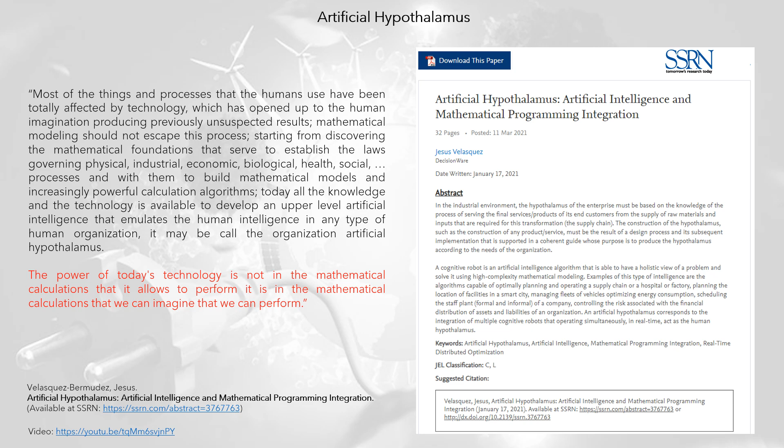Artificial hypothalamus. The power of today's technology is not in the mathematical calculations that it allows to perform, it is in the mathematical calculations that we can imagine that we can perform.

Oil supply chain optimization. Oil enterprise-wide optimization integrates mathematical models for each of the links in the oil supply chain, in such a way as to manage the planning of the supply chain with a holistic vision.

The design of HAI-OIL EWO was the result of work done for a multi-business oil company. The union of models, and their coordination, forms the hypothalamus of an oil enterprise.

The current computational power allows detailed modeling of the supply chain, considering individually all the systems that compose it. This allows visualization of all existing bottlenecks that affect the maximization of economic gains.

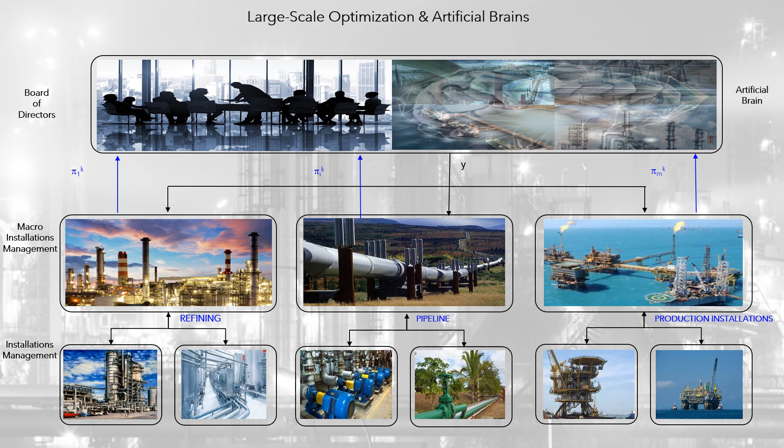When all the models that make up a company are solved using the concepts of real-time distributed optimization, an artificial hypothalamus is obtained. Large-scale optimization and artificial brains.

One of the fundamental ideas of the artificial brain is the atomization of the system, a bottom-up approach, to integrate multiple mathematical models, using the framework of large-scale optimization methodologies, like multi-level Benders decomposition and Lagrangian relaxation.

HAI-OIL meets all the software solutions developed by HI, in different areas of application of mathematical optimization models, oriented to planning and scheduling operations, in different businesses of the petroleum product supply chain.

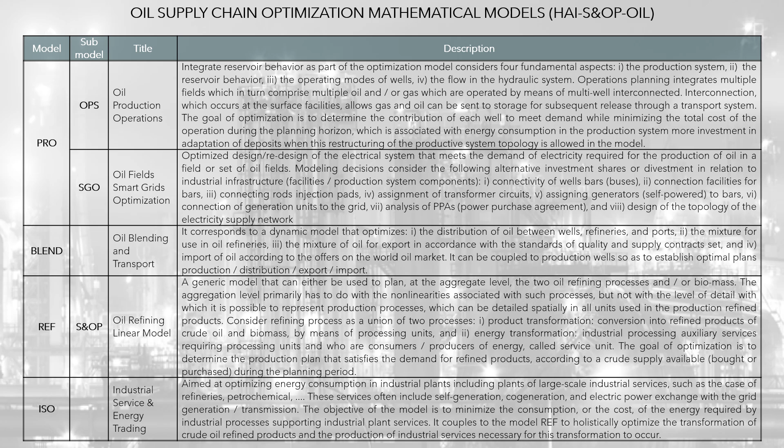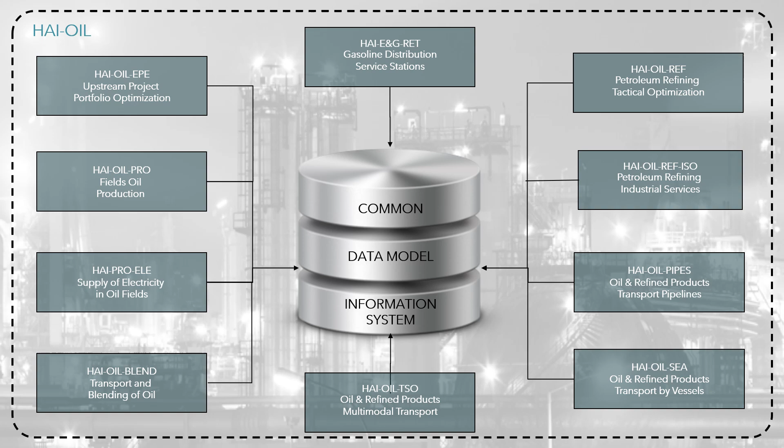All models may be part of the hypothalamus of an oil organization. All models that integrate an artificial hypothalamus must share a general data model so that they are easily integrated. In 2010, HI executed the project: The Hypothalamus of an Oil Organization.

Challenge: design and implementation of a DSS decision support system for the optimization of energy resources that links all steps of the supply chain of petroleum products, with emphasis on the consumption and marketing of the energy used by the network.

Solution: design and prototype implementation of a DSS with the following models: production of crude oil, transportation of crude oil, oil and biomass refining, production and industrial services, and transport of refined products.

Result: the model is the base for the formal implementation of the value chain model for a Latam petroleum company. The models were delivered in prototype version, in the sense that the oil company did not have the database ready in the expected time. This is one of the most important projects developed by HI.

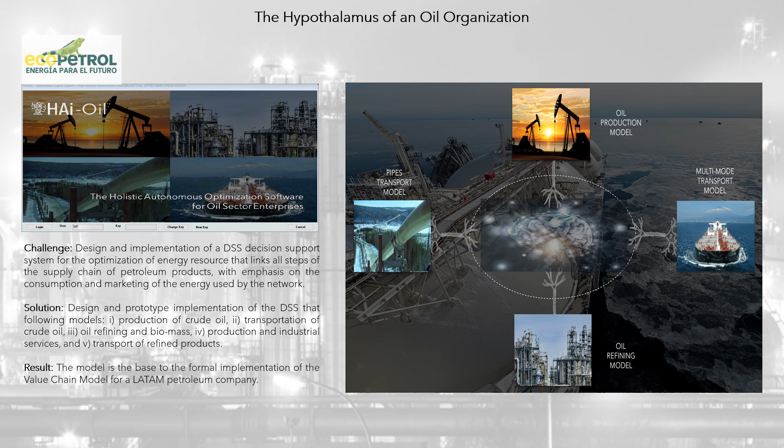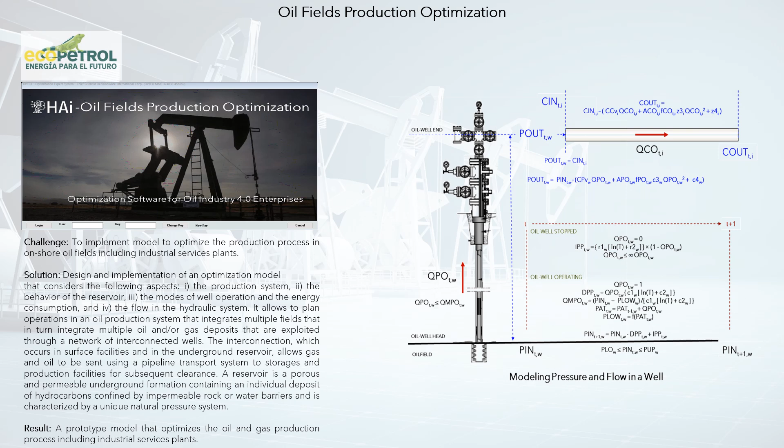Oil production optimization. Oil fields production optimization model. Challenge: to implement a model to optimize the production process in onshore oil fields, including industrial services plants.

Solution: design and implementation of an optimization model that considers the following aspects: the production system, the behavior of the reservoir, the modes of well operation, the energy consumption, and the flow in the hydraulic system.

It allows planning of operations in an oil production system that integrates multiple fields, which in turn integrate multiple oil and/or gas deposits, that are exploited through a network of interconnected wells.

The interconnection, which occurs in surface facilities and in the underground reservoir, allows gas and oil to be sent using a pipeline transport system, to storages and production facilities for subsequent clearance.

A reservoir is a porous and permeable underground formation, containing an individual deposit of hydrocarbons confined by impermeable rock or by water barriers, and is characterized by a unique natural pressure system.

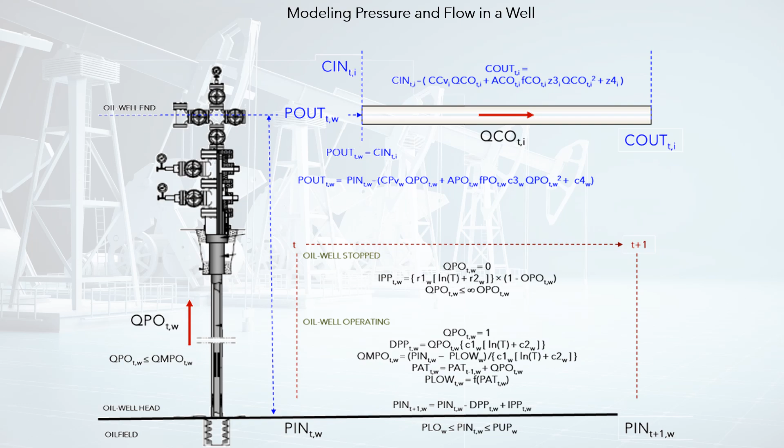The conceptualization of the field can be done based on the following principles. Well: it corresponds to the basic unit of production.

Reservoir: it corresponds to a set of wells that operate an oil deposit interconnected in the subsoil. Field: it corresponds to a set of multiple oil deposits which contribute their production to a collection and processing infrastructure.

The collection infrastructure is composed of: separator, a production unit in which oil, gas and water are separated; collector, composed of a network of pipes that connect the fields with the separator; and tanks, storages of oil, gas and water already processed. The topologies of the network can be very varied, since an O&G production facility can have multiple components of each type.

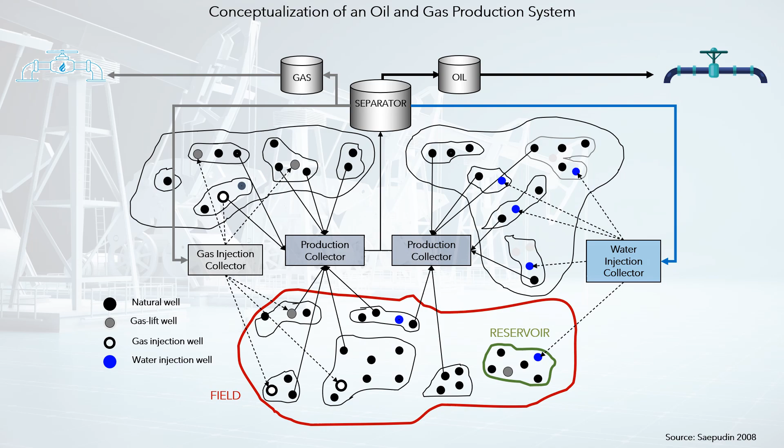Project: Exploration and Production Investment Petroleum Portfolio Optimization. Challenge: to optimize the portfolio of investment projects in oil exploration and production (E&P) activities.

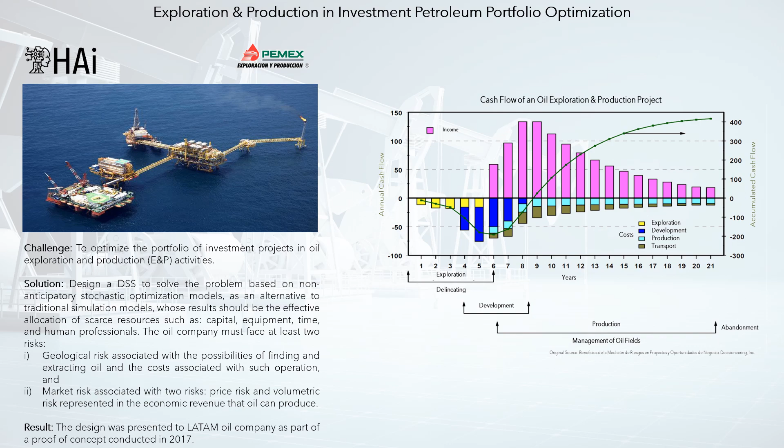Solution: design a DSS to solve the problem based on non-anticipatory stochastic optimization models, as an alternative to traditional simulation models, whose results should ensure the effective allocation of scarce resources such as capital, equipment, time, and human professionals.

The oil company must face at least two risks: geological risk, associated with the possibilities of finding and extracting oil and the costs associated with such operations; and market risk, associated with price risk and volumetric risk, represented in the economic revenue that oil can produce.

Result: the design was presented to a Latam Oil Company as part of a proof of concept conducted in 2017.

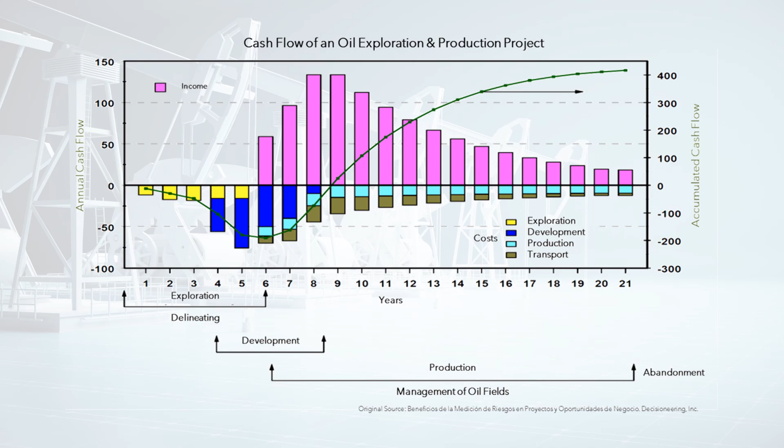Project: Oil Fields and Smart Grids Optimization. Challenge: to develop a model to redesign the energy supply system of oil onshore fields.

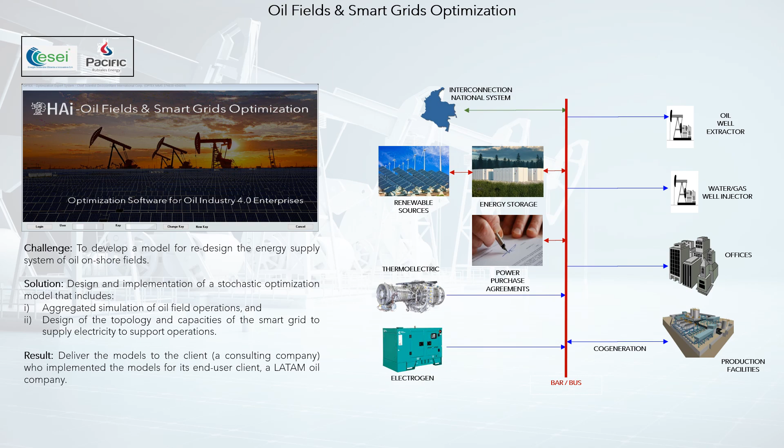Solution: design and implementation of a stochastic optimization model that includes aggregated simulation of oil field operations, and design of the topology and capacities of the smart grid to supply electricity to support operations. Result: deliver the models to the client, a consulting company, who implemented the models for its end-user client, a Latam oil company.

Oil refining optimization. Sales and operations planning. Linear model. Challenge: to implement a model to optimize sales and operations planning for refineries and biorefineries.

Solution: design and implementation of an S&OP optimization model for aggregated planning of crude oil and biomass refining. Aggregation is associated with process nonlinearities, but not with the level of detail to represent process connectivity. The objective of optimization is to determine the production plan that meets the demand for refined products, according to a supply of available crudes purchased during the planning period.

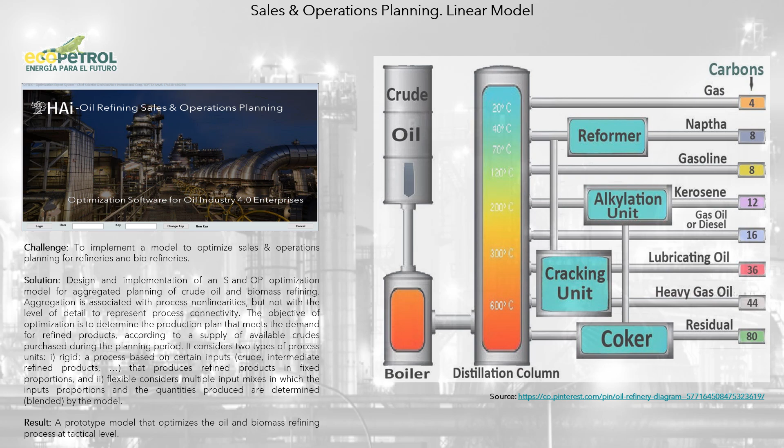It considers two types of process units: rigid, a process based on certain inputs - crude, intermediate, refined products - that produces refined products in fixed proportions; and flexible, which considers multiple input mixes in which the input proportions and the quantities produced are determined, blended, by the model.

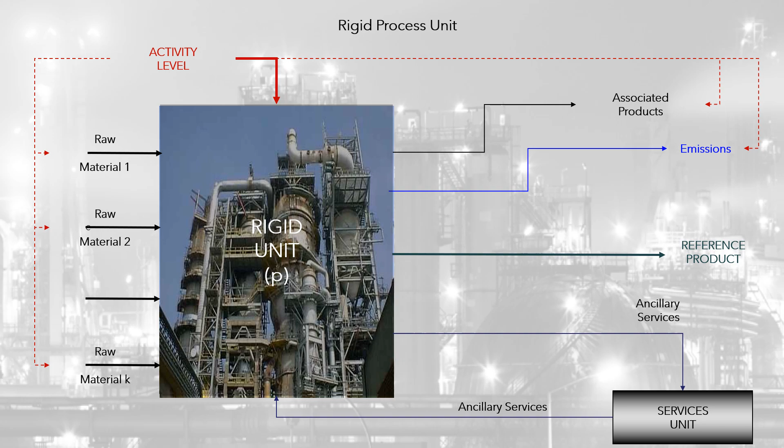Rigid unit considers a unit as a process defined based on certain input - raw material, refined final or intermediate products - that produces refined products in fixed proportions. Flexible unit considers multiple possibilities for production processes in which the proportions of the blending of the products consumed, and the quantities produced, are determined by the model.

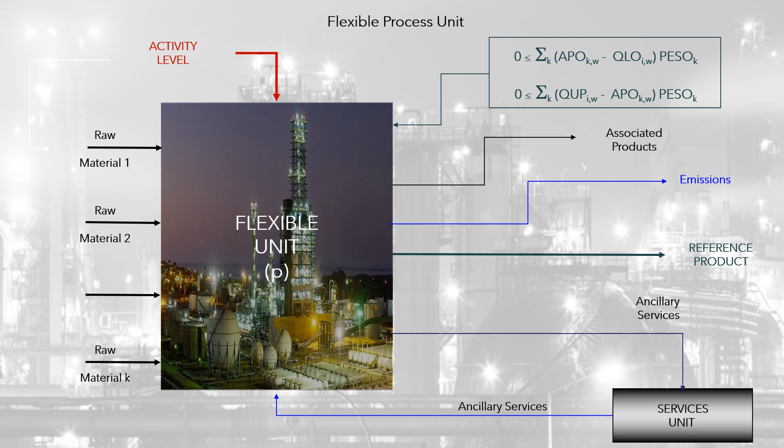Refined petroleum production and energy services planning model. Challenge: to develop an integrated production and industrial services optimization, considering that the optimal management of power of industrial systems implies a holistic position oriented to integrate the production planning of goods with industrial energy services that are consumed in the production plant, and finally integrate it with possibilities of self-production and negotiation of this energy in the energy markets.

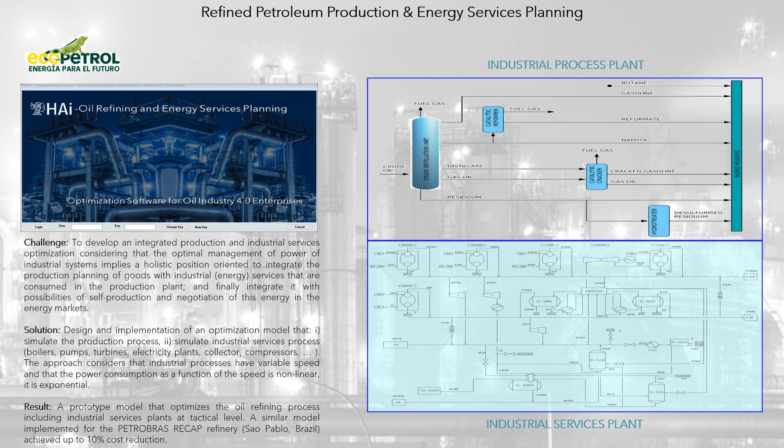Solution: design and implementation of an optimization model that simulates the production process, and simulates industrial services processes like boilers, pumps, turbines, electricity plants, collectors, compressors, etc. The approach considers that industrial processes have variable speed, and that the power consumption as a function of the speed is nonlinear, it is exponential.

Service plant: place where various industrial operations related to the auxiliary services demanded by process plants are developed. Auxiliary service: essential services for the operation of any production system. They allow guaranteeing the quality and continuity of the process.

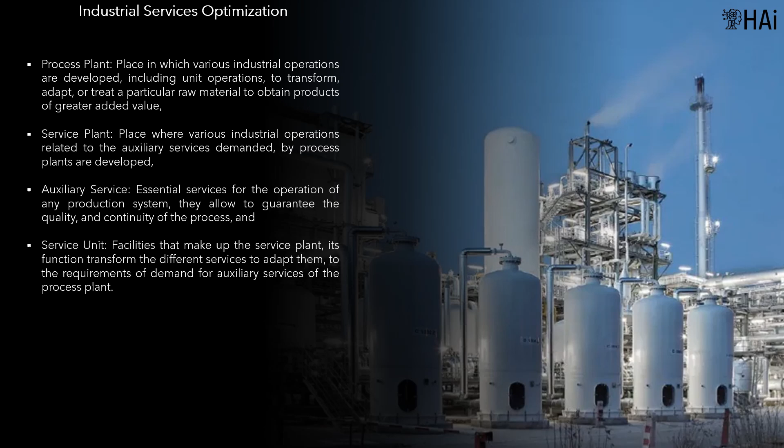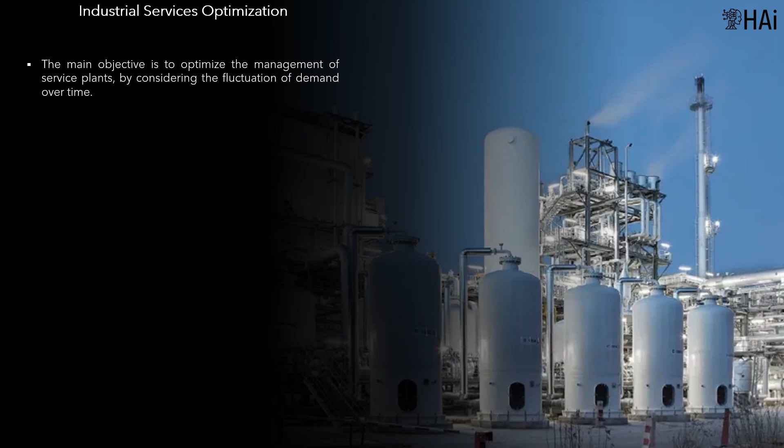Service unit: facilities that make up the service plant. Its function is to transform the different services to adapt them to the requirements of demand for auxiliary services of the process plant. The main objective is to optimize the management of service plants by considering the fluctuation of demand over time. The optimization of the two plants is carried out in an integrated model.

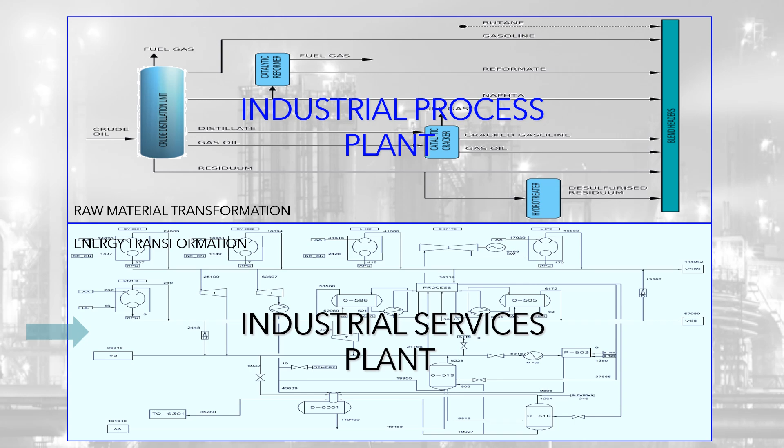Result: a prototype model that optimizes the oil refining process, including industrial services plants at tactical level. A similar model implemented for the Petrobras Recap refinery, São Paulo, Brazil, achieved up to 10% cost reduction. It is part of the oil and gas artificial hypothalamus.

Oil transport, trading and blending optimization corresponds to a dynamic model that optimizes oil distribution between wells, refineries and ports, the oil mix for use in refineries, the mixture of oil for export in accordance with quality standards and established supply contracts, import of oil according to offers in the spot global oil market, and import/export of oil according to offers in oil derivatives financial instruments.

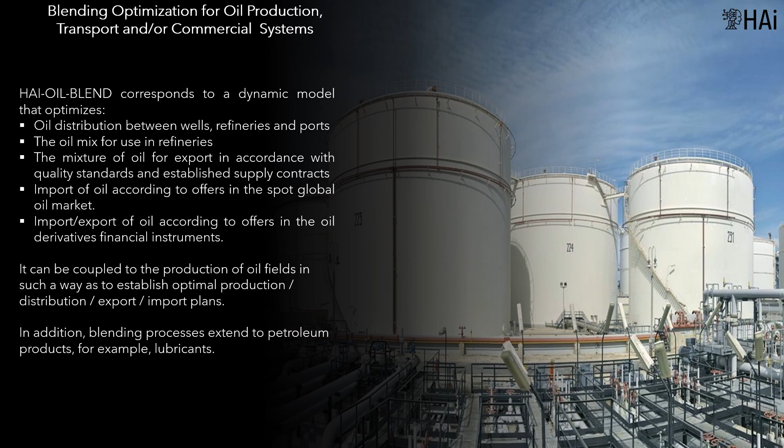It can be coupled to the production of oil fields, in such a way as to establish optimal plans for production, distribution, export and import. In addition, blending processes extend to petroleum products, for example, lubricants.

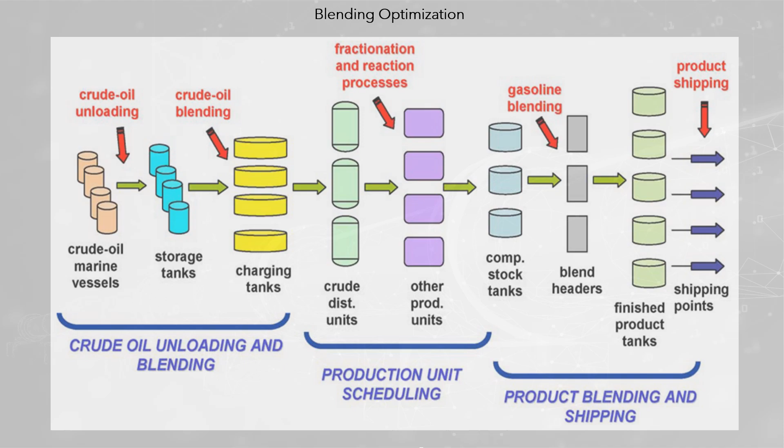In the petroleum chain, the blending process of materials takes place in several parts. In the refineries, at the entrance of the refining process, blended crude oil is required, and at the exit, it is necessary to mix the refined products. These blending systems can be located in a distributed manner, which can lead to significant cost savings, due to the flexibility of the crude oil chain.

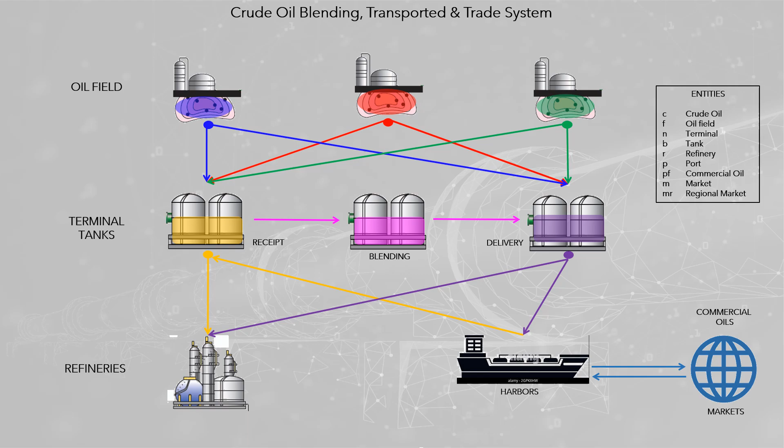The diagram presents the flow of materials in the petroleum system. The entities considered in the modeling are crude oil, oil field, oil terminal, tank, refinery, oil port, commercial oil, market, and regional market.

R&D+I project: oil blending and transport planning and scheduling model. Challenge: to implement an oil blending dynamic optimization model. Solution: design and implementation of an oil blending dynamic mathematical model. Result: implementation of a prototype model in a joint effort with Deloitte Mexico to perform a proof of concept for a potential client. Unfortunately, the customer didn't buy.

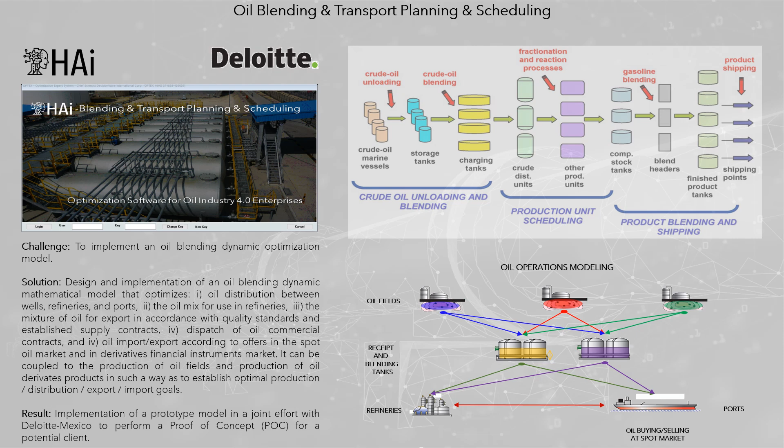Pipeline systems optimization. HAi includes solutions aimed at planning and scheduling operations in the supply chain of transportation services. It considers two types of transport: pipelines and multimodal vehicles, such as tankers, barges, boats, and trains. The models developed by HAi are tactical pipeline planning, scheduling pipeline batches, real-time pipeline dispatch, coordination of petroleum vessels and installations, and petroleum and refined products distribution.

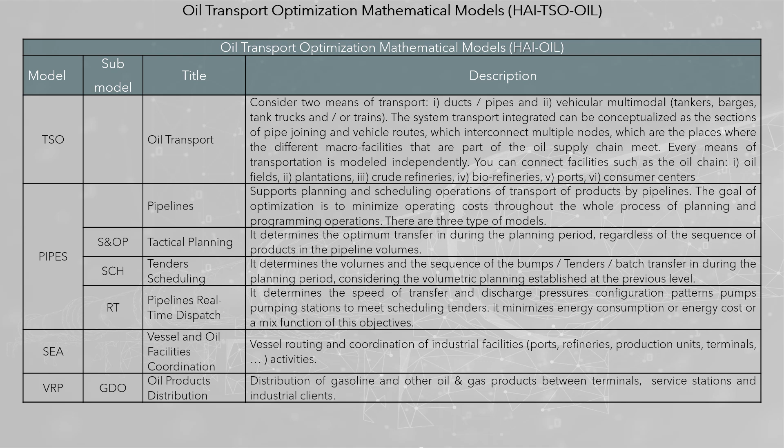Project: real-time optimization of the operations in oil pipeline systems. Challenge: to design and implement models for real-time optimization of the operations in oil pipeline systems. Solution: design and implementation of a set of optimization mathematical models that include the use of pumping stations and the simulation of operating conditions based on detailed models of the hydraulic behavior of the system components. The solution includes large-scale optimization methodologies.

Result: real-time operations model to dispatch the batches of products, heavy crude oil, in the pipelines. In test case runs, it was verified that the difference between minimizing energy consumption and minimizing the total cost of operation can be of the order of 20%.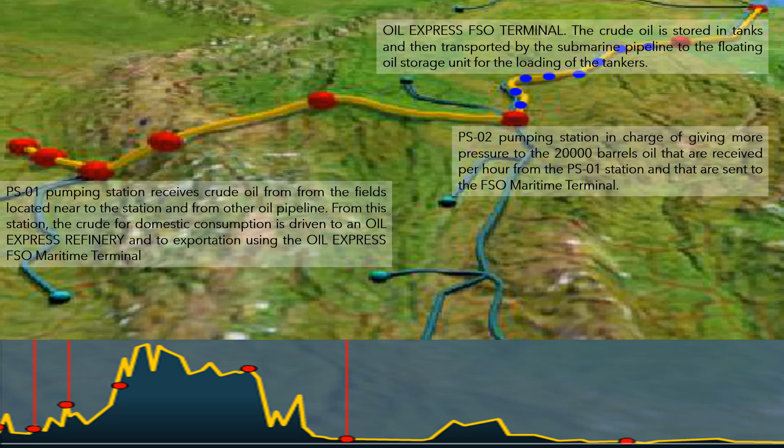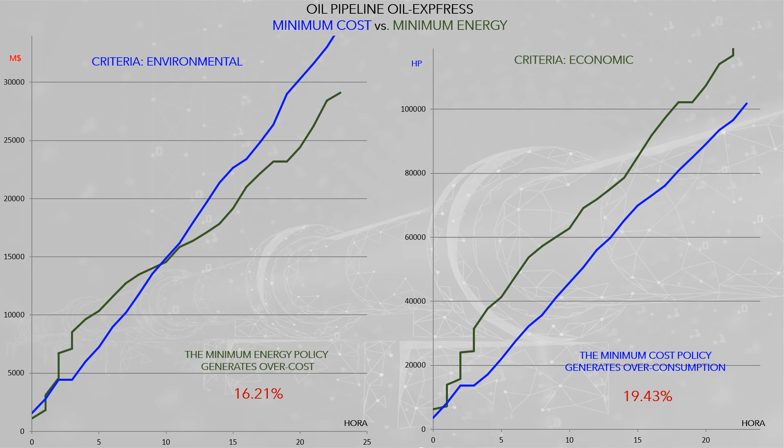Comparing the results of the objective function of the two operating policies, it can be observed that the minimum energy policy generates 16.21% overcost, and the minimum cost policy generates 19.43% overconsumption. As you can see, the differences are not negligible, and are a measure of the precision that mathematical models can provide when solving real-life problems. Estimating this difference based on good practices and/or mental models is practically impossible.

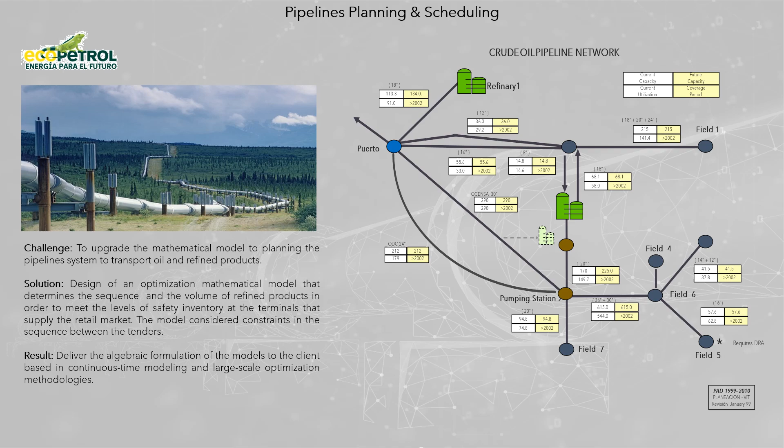Project: Pipelines Planning and Scheduling. In 2003, HAi received a request from a Latam oil company. Challenge: to upgrade the mathematical model for planning the pipeline system, to transport oil and refined products. Solution: design of an optimization mathematical model that determines the sequence and volume of refined products to meet the levels of safety inventory at the terminals that supply the retail market. The model considered constraints in the sequence between the tenders. Result: delivery of the algebraic formulation of the models to the client, based on continuous time modeling and large-scale optimization methodologies.

Vessel scheduling optimization supports the programming of collection and/or distribution operations of products via maritime ways, in tankers and barges. It considers restrictions for delivery and load time windows, distribution of capacities on ship, loading and unloading capacity at the docks, draft capacity, speed of movement of ships, tanker weight to draft ratio, and synchronization of filling or emptying of storage tanks.

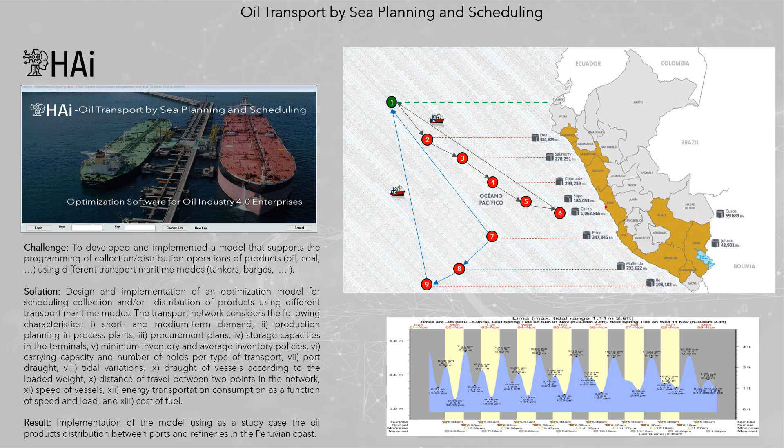Research and Development Project: Oil Transport by Sea, Planning and Scheduling. Challenge: to develop and implement a model that supports the programming of collection and distribution operations of products, oil, coal, using different maritime transport modes, like tankers, barges, etc.

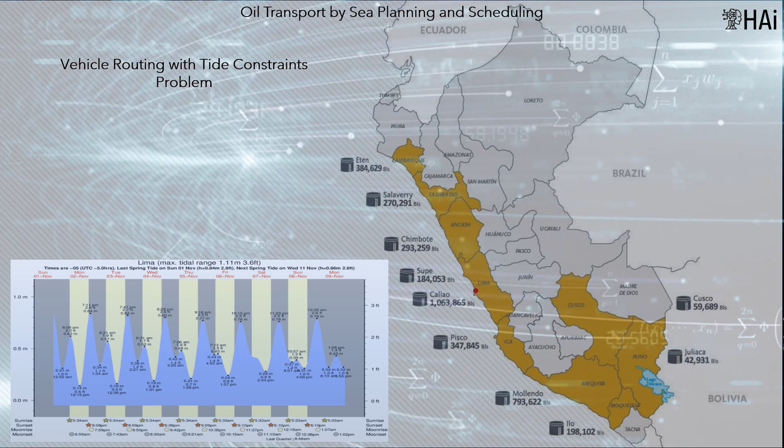Solution: design and implementation of an optimization model for scheduling collection and/or distribution of products using different transport maritime modes. The transport network considers the following characteristics: short and medium-term demand, production planning in process plants, procurement plans, storage capacities in the terminals, minimum and average inventory policies, carrying capacity and number of holds per type of transport, port draft, tidal variations, draft of vessels according to loaded weight, distance of travel between two points in the network, speed of vessels, energy transportation consumption as a function of speed and load, and cost of fuel.

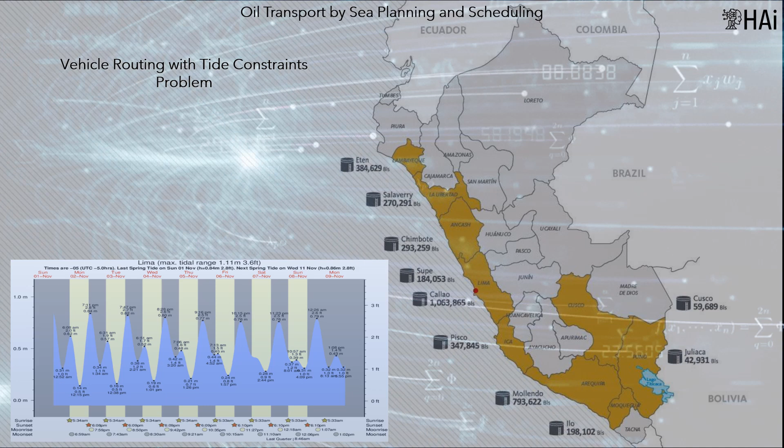A real case of distribution of petroleum products by sea, with tidal restrictions, is the planning of the distribution of products from the Talara refinery along the oil terminals in the Peruvian coast. When it is necessary to make decisions about the displacement of the vessel, it is of fundamental importance to correctly model the consumption of energy, which has a nonlinear behavior with respect to the engine speed of the vessel. This constraint can be included in the mathematical model, as well as the modeling of tidal movements when entering or leaving ports. Result: implementation of the model using as a study case the oil products distribution between ports and refineries in the Peruvian coast.

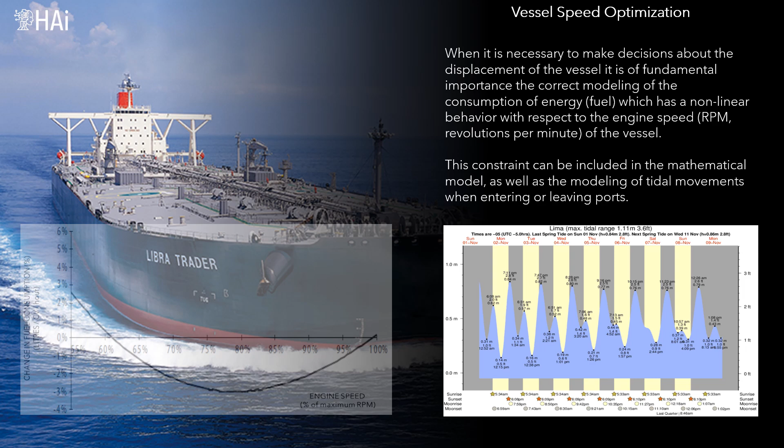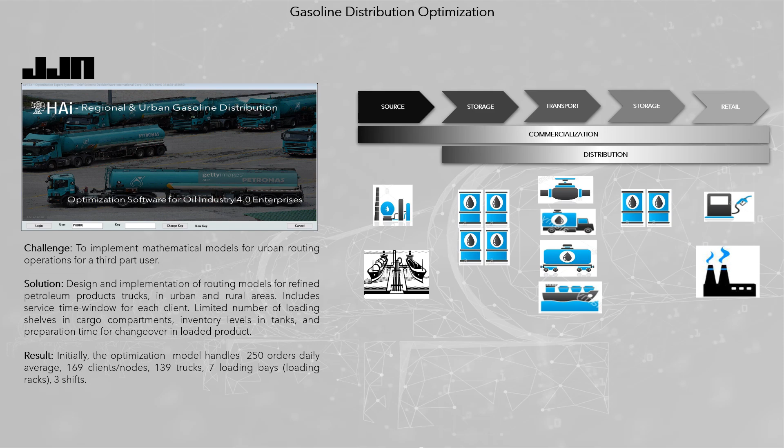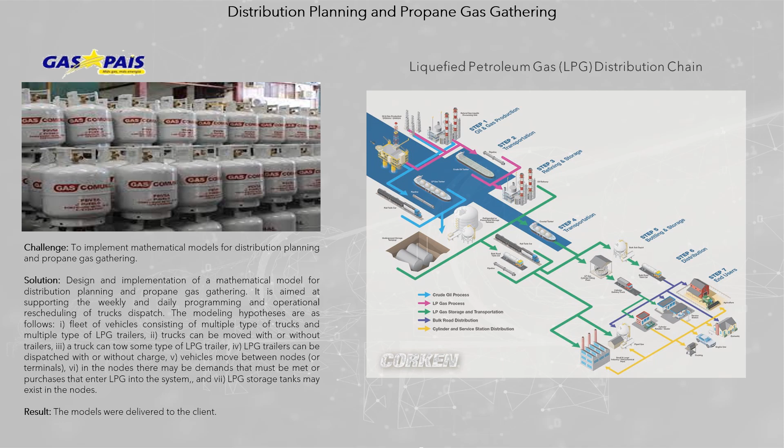Fleet of vehicles consisting of multiple types of trucks and multiple types of LPG trailers. Trucks can be moved with or without trailers. A truck can tow some type of LPG trailer. LPG trailers can be dispatched with or without charge. Vehicles move between nodes, or terminals. In the nodes there may be demands that must be met or purchases that enter LPG into the system, and LPG storage tanks may exist in the nodes. Result: the models were delivered to the client.

Natural gas systems and markets optimization. HAi has developed the HAi gas model that can be integrated with HAi-POWER, to simulate the gas market and the electricity market simultaneously. Applications made with HAi gas are described. HAi gas describes the process of supply and demand of natural gas. From this point of view, its integration with the electricity system determines the economic equilibrium of electricity-gas markets.

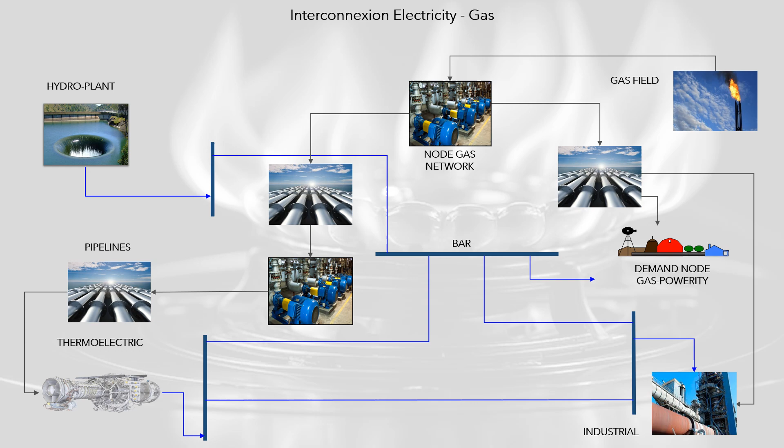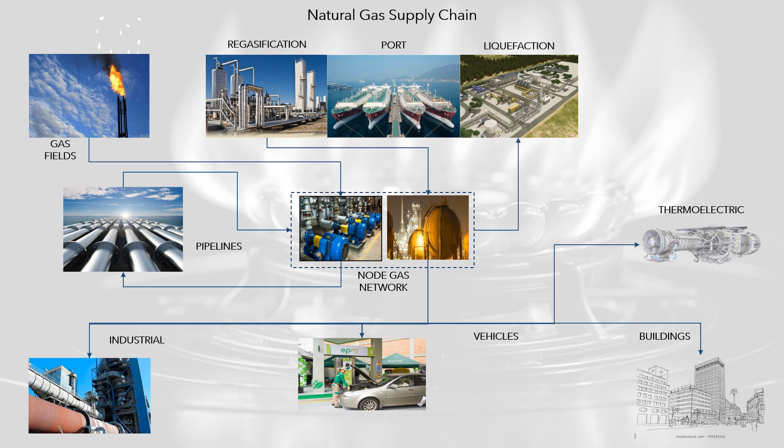The entities of the natural gas system are: nodes, which connect the gas system installations; production fields; consumption zones, discriminated by sector, for example refineries, heavy industries, residential, vehicular, commercial and thermoelectric power plants; transport systems, pipelines, and multimodal transport systems using vehicles; pumping stations, which compress the gas to transport it; and ports, which receive and ship liquefied natural gas, LNG, and have gas storage capacity. Connectivity between the electricity and gas sectors occurs through the demand for natural gas for use in thermal plants, and the substitution of the demand that can occur between gas and electricity.

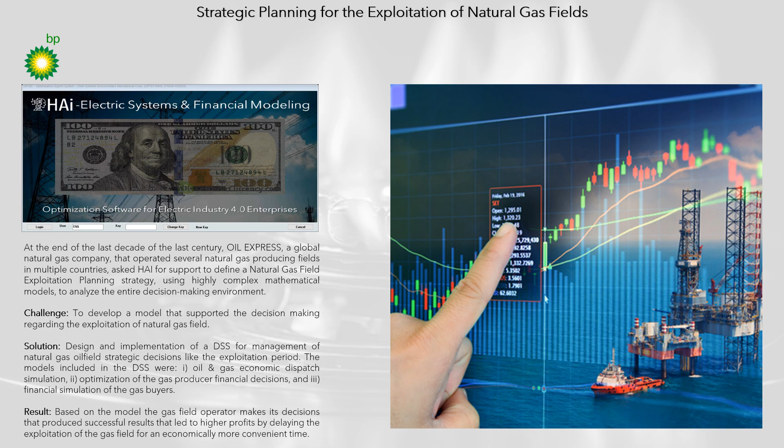Project: strategic planning for the exploitation of natural gas fields. At the end of the last decade of the last century, Oil Express, a global natural gas company that operated several natural gas producing fields in multiple countries, asked HAi for support to define a natural gas field exploitation planning strategy, using highly complex mathematical models, to analyze the entire decision-making environment. The challenge was to develop a model that supported the decision-making regarding the exploitation of the natural gas field and its impact on Oil Express finances.

Solution: design and implementation of a DSS for management of natural gas field strategic decisions like the exploitation period. The models included in the DSS were: electricity and gas economic dispatch simulation, optimization of the gas trading decisions, optimization of the financial and fiscal decisions, and financial simulation of the gas buyers. The analysis was carried out using take-or-pay contracts as a basis.

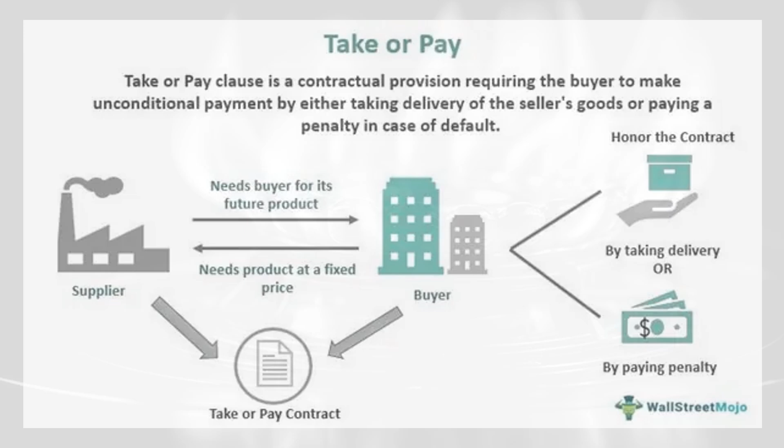Result: the SHTG model, hydrothermal and gas system, the first version of the actual HAi-POWER model. Based on HAi-POWER, Oil Express made decisions that produced successful results that led to higher profits by delaying the exploitation of the gas field for an economically more convenient time, due to the non-sustainability of the market.

Successful decisions. For its part, Oil Express has proven that there are no market conditions, that is, there does not exist a good set of profitable thermal generators that can pay for gas through TOP contracts, required to guarantee the extraction of natural gas. If it is a question of compensating the situation based on price, if Oil Express sells natural gas at high prices, it is possible that Oil Express must recover bankrupt industrial company assets. Everything seems to indicate that the optimal decision may be to delay the investment, waiting for a market with better conditions.

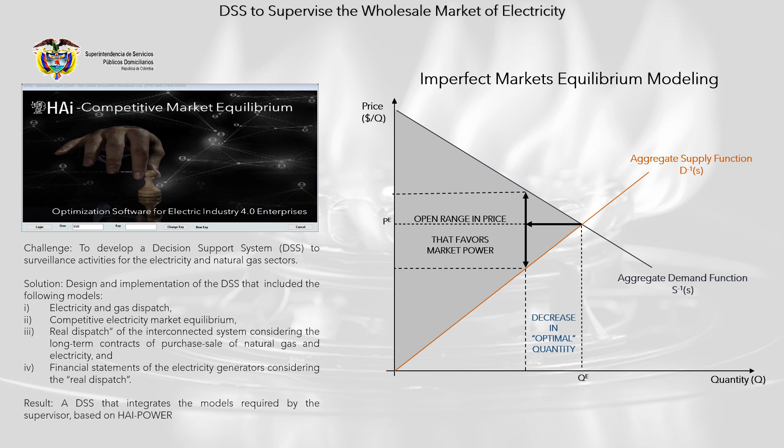Use case: surveillance of the electricity and natural gas sector. A supervisor of the electricity and natural gas sectors hired HAi to solve the following problem. Challenge: to develop a decision support system, DSS, for surveillance activities for the electricity and natural gas sectors. Solution: design and implementation of the DSS that included the following models: electricity and gas dispatch, competitive electricity market equilibrium, real dispatch of the interconnected system considering the long-term contracts of purchase-sale of natural gas and electricity, and financial statements of the electricity generators considering the real dispatch. Result: a DSS that integrates the models required by the supervisor, based on HAI-POWER.

Project: Natural gas system and market dispatch model. Challenge: to implement a mathematical model to simulate the transportation, production and consumption of natural gas that describes its processes of supply and demand. Solution: design and implementation of an optimization model that includes the following types of nodes. Production fields. Consumption centers, natural gas demand nodes discriminated by demand sector, among which are industrial, vehicular, electricity generation, commercial and residential. And ports, terminals that can receive and/or send LNG, associated with liquefaction and/or regasification plants.

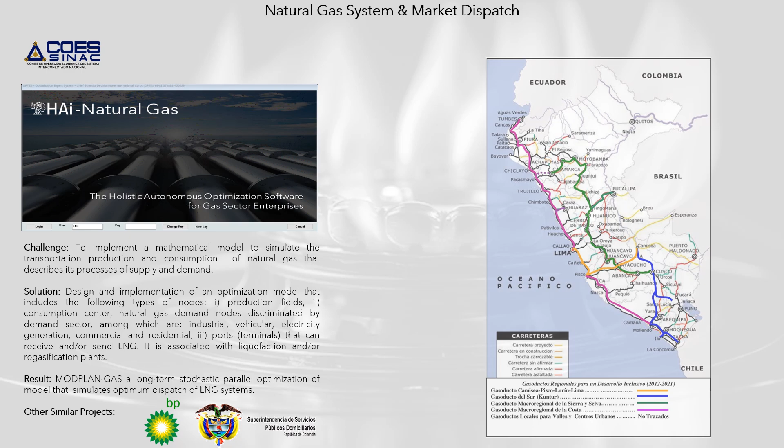Result: MODPLAN-GAS is a long-term stochastic parallel optimization model that simulates the optimal dispatch of LNG systems. ModPlan power and gas, by law, is the official model in Peru for the analysis of the expansion plan of the transmission network. Like Herbert Simon, HAi artificial intelligence believes that computer-based mathematical modeling is the greatest invention of all times.